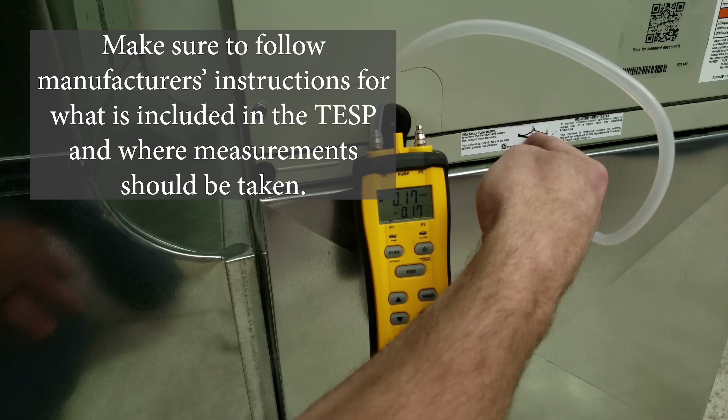If you did have a filter that was shipped with the air handler, you want to have that in here when you're taking your total external static pressure measurements, because that's typically included. In this case, the air handler was not shipped with a filter, so it's not included. Anyway, we have our red arrow pointing in the direction in which our tip is facing. So we want to have it faced towards where the airflow is coming in. And you see we have a measurement of 0.16 inch water column.

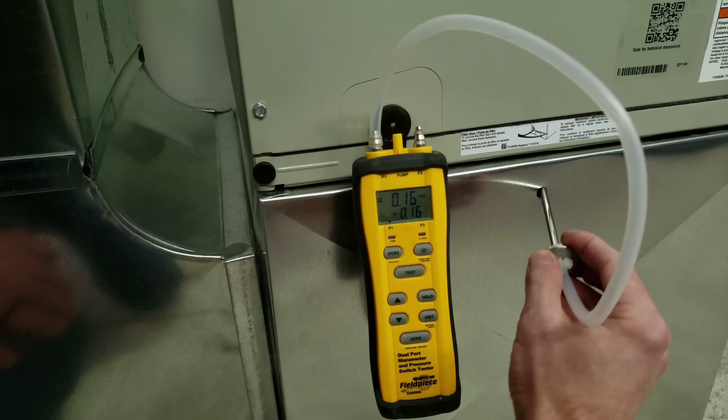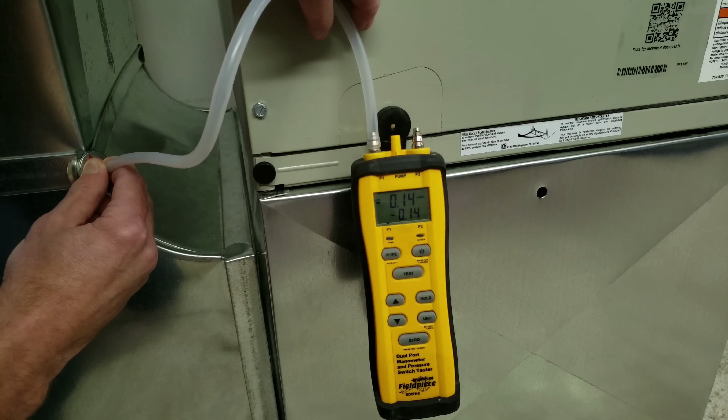And I just wanted to show you this one other thing. You're typically going to have mastic covering over your drives and slides, but I pulled this apart just to show you. I'm going to put this tip in on an angle. You're going to see that you have a lower static pressure over here, and the further you get away from the air handler, the lower your static pressure is going to be. So 0.14. So that's why you want to get as close as possible. You don't want to be in this duct over here. You want to be right here.

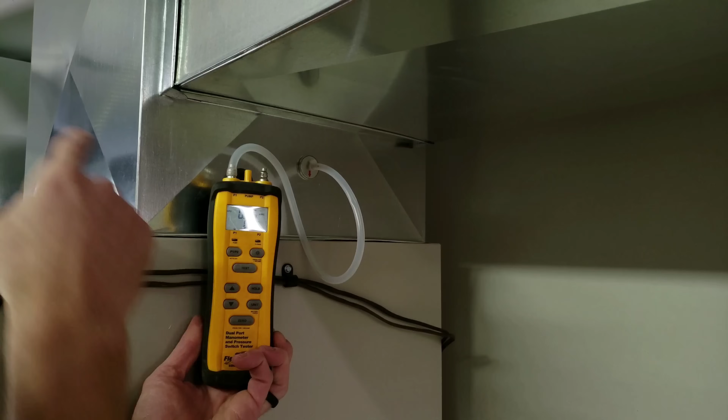Now we have our static pressure tip right here in the supply, and you see it's pointed downwards. We have it on the side here because the air handler supply is not so wide. It's only back here. So we wouldn't want to have our tip over here because it wouldn't be in the main airstream. So you see that we're reading right about 0.16.

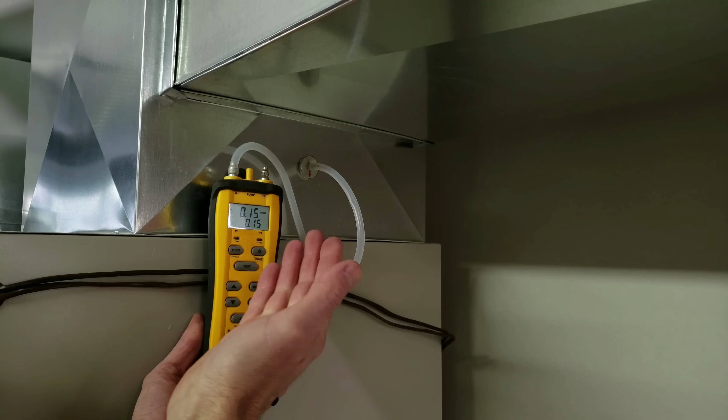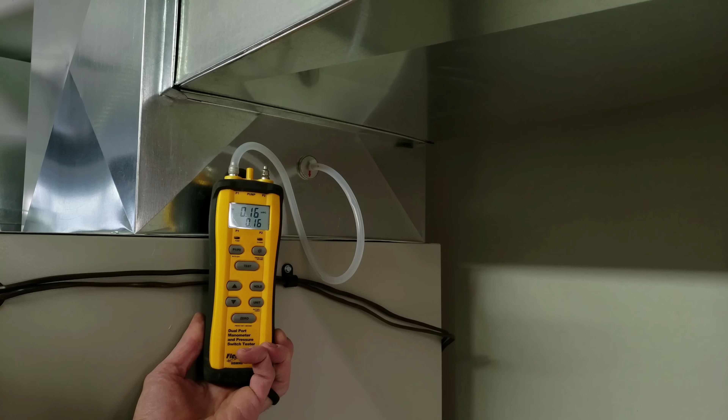It's going to be pretty turbulent there, but we're trying to get as close as possible. So we're at about 0.14 to 0.17, 0.18. So I would say let's go with about 0.16. So that's our static pressure for our supply.

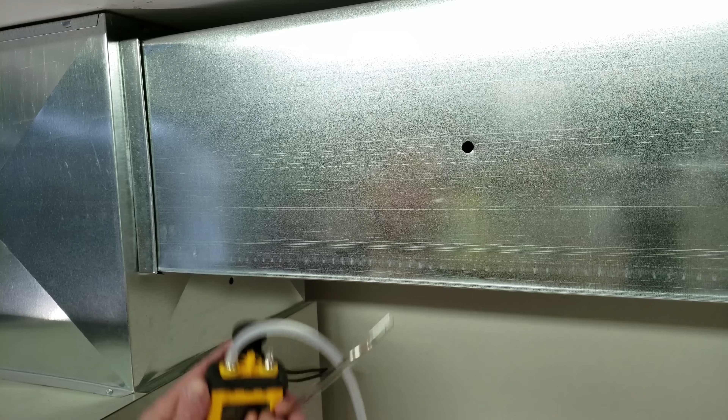So this is where you want to take your measurement at, right where the air is exiting the air handler and entering into the supply plenum. You would not want to have it over here, because this static pressure measurement is going to be likely lower. So we're reading anywhere from 0.12 to 0.14, so that's a lot lower than in this plenum here.

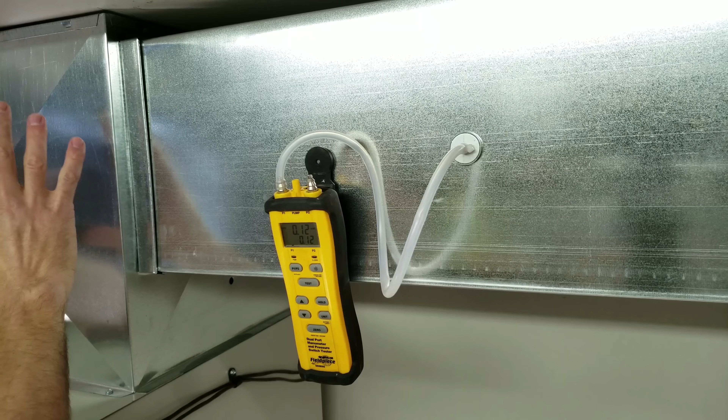And that's because this is not a transition. This is just a straight box plenum, and so the pressure is going to be a lot higher in here, and the air is turbulent trying to make it into this duct. By the time it gets into this duct, it's going to be a lower pressure.

Here's our airflow data, and we have a B for our model number. And we were running the airflow across a dry coil because we turned the outdoor condensing unit disconnect to the off position, so the compressor was not running. However, the blower motor was running. And I checked to see what tap we were on. Even though we're in cooling mode, the blower tap that was being used was low. Here you have low, medium, or high, and we happen to be using low.

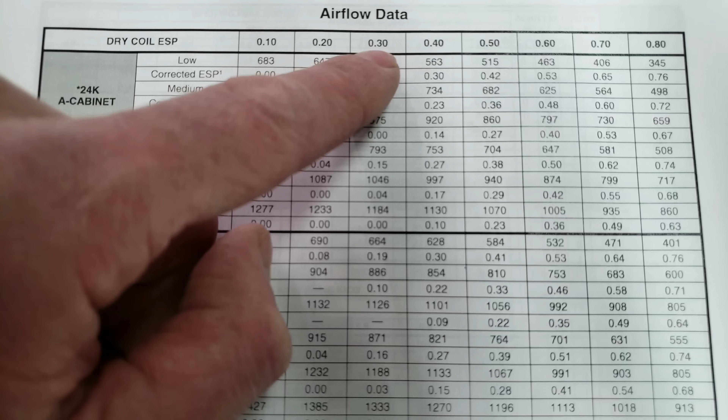And here we have our total external static pressures up here, and we're going to be lining up on 0.3. So 0.3 and low right here is where we're going to end up at. But the reason we ended up at 0.30 is because we are adding our static pressure on the return with our static pressure on the supply. However, our return static pressure was negative and our supply static pressure was positive.

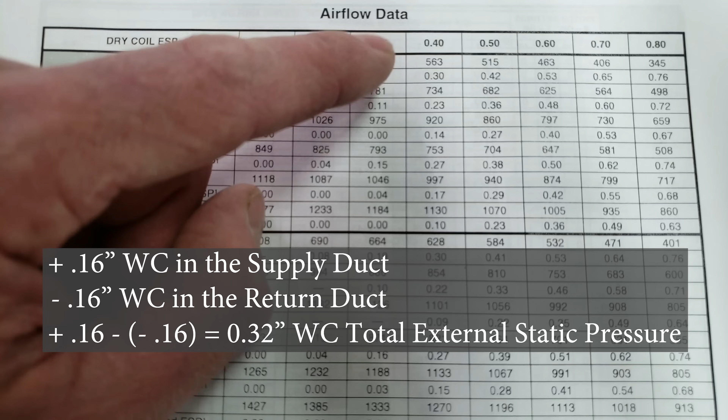So we got 0.16 at the supply and negative 0.16 at the return. So technically the equation would be positive 0.16 minus a negative 0.16. But anyway, you just add them together. And so we get 0.32 for our total external static pressure. So we're very close to 0.3. So we have an airflow of 664 CFMs. That amount of CFMs is just too low.

We need to have a CFM of around 800 CFMs because we have a model number outside that indicates 24,000 BTUs of heat removal. For every 12,000 BTUs of heat removal, that's 1 ton of air conditioning, and you need roughly 400 CFMs for that. So since we have 24,000 BTUs, that's 2 tons, and we need around 800 CFMs. So this is just too low.

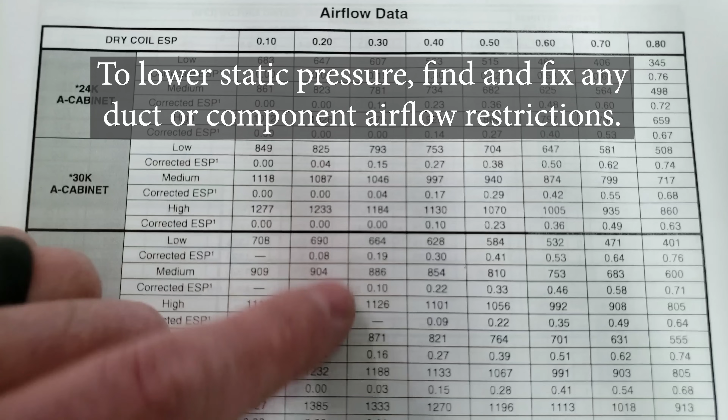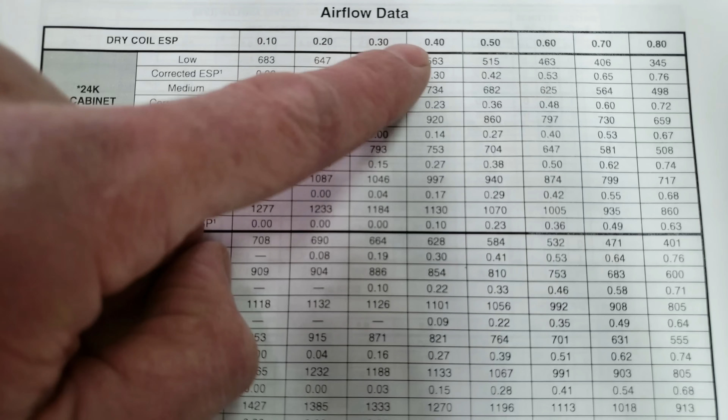So to increase the airflow, we either need to lower the static pressure to increase the airflow. In this case, we're going to need to jump to the medium blower speed, and then we're going to need to check our static pressure again on the return and the supply and line it up here with our airflow data. It's likely going to increase to maybe 0.4 or something like that. And then we're going to have the correct amount of airflow.

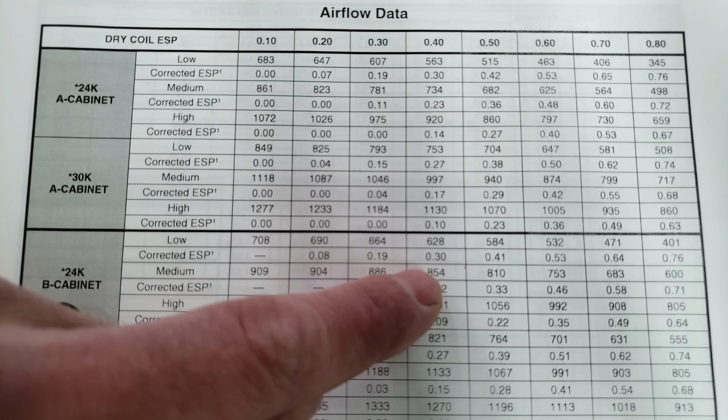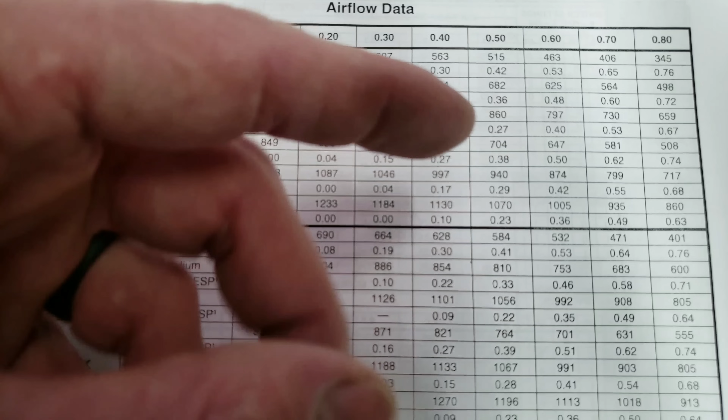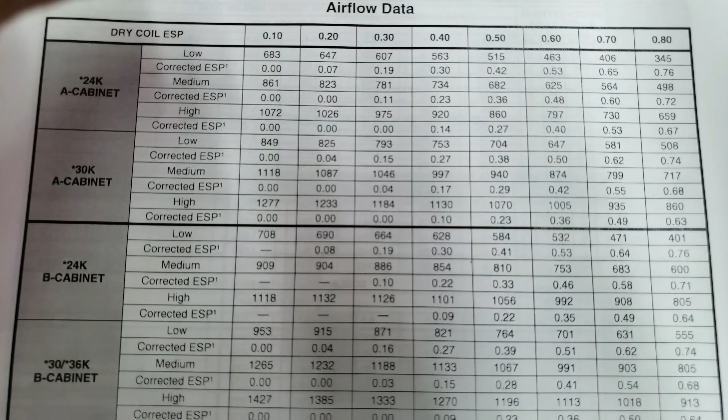We're going to have just a little bit too much airflow. But if we get right around 350 to 425 CFMs, that would be correct for every ton. So maybe we get 0.43, then we would be a little bit lower, a little closer to what we need. So once again, if there's an airflow restriction or maybe the filter is creating too much pressure drop across it, you might want to replace that with another one. But that's how you check airflow and you set airflow with the manufacturer's data.

So I have the air handler running in low speed still, and I just wanted to double check my measurements for my airflow with my hot wire anemometer. My measurements here, I got an average CFM of 682. So that's very, very close to what we got when we took the total external static pressure of the air handler and compared that to the manufacturer's literature.